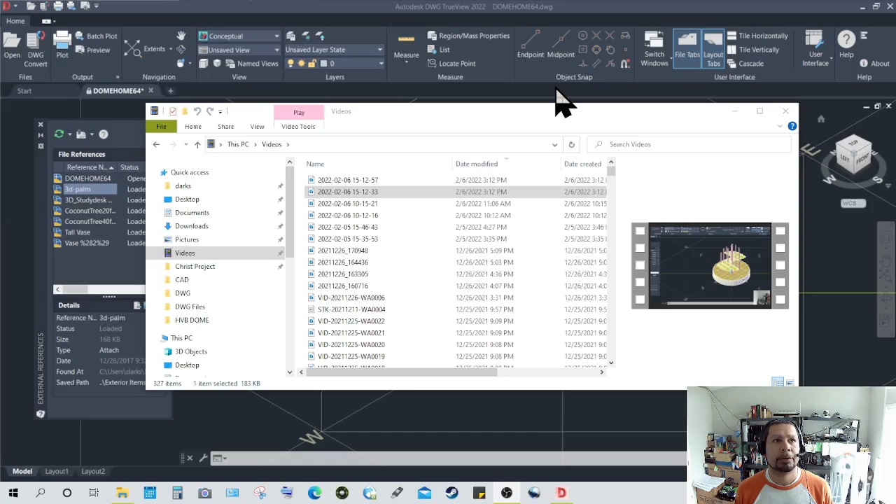This is the 64th iteration of that design. I decided to push forward even though I found some issues with the model, some minor layering issues that I will push forward with because I don't have the full version of AutoCAD right now. This is just a DWG viewer with very limited AutoCAD functions, so for the sake of time I will go ahead and push forward.

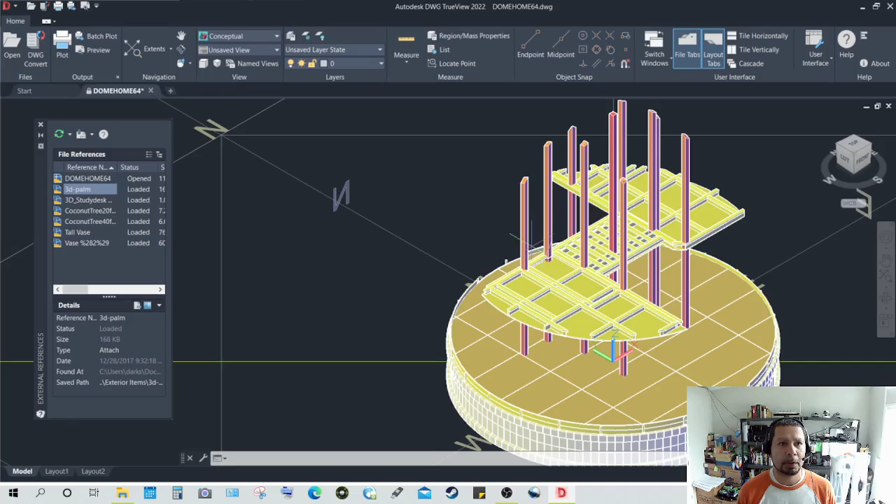This is the model again, showing both the first deck floor panels and the second deck floor frame. As you can see, these are 2x6 pieces or members of lumber, and the ones overlaid on top are 2x4s. Again, 2x4 not being the exact dimensions - as I mentioned, the real dimensions are 3.5 by 1.5 inches.

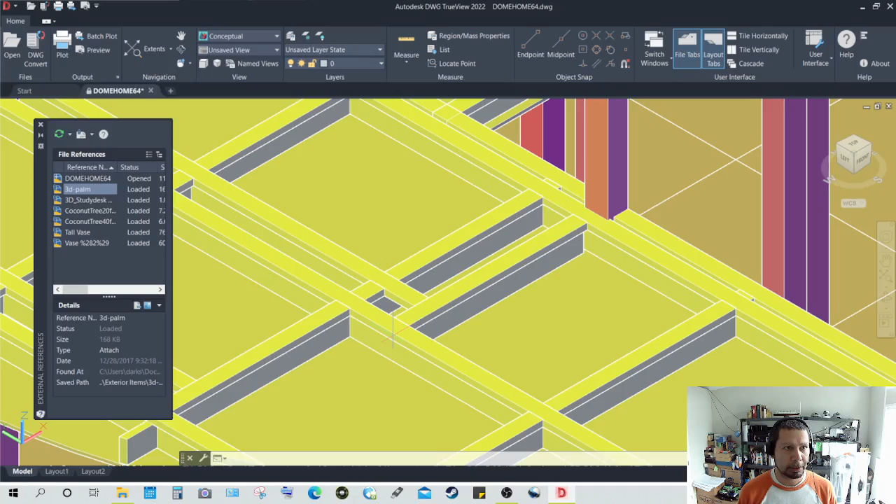So this is the floor or ceiling frame, whatever you want to call it. These panels underneath are the ceiling for the first deck, the ceiling panels. Again, these are 8 foot by 4 foot, or vice versa, planks of plywood or any other material you deem replaceable, similar, or better to use in this application.

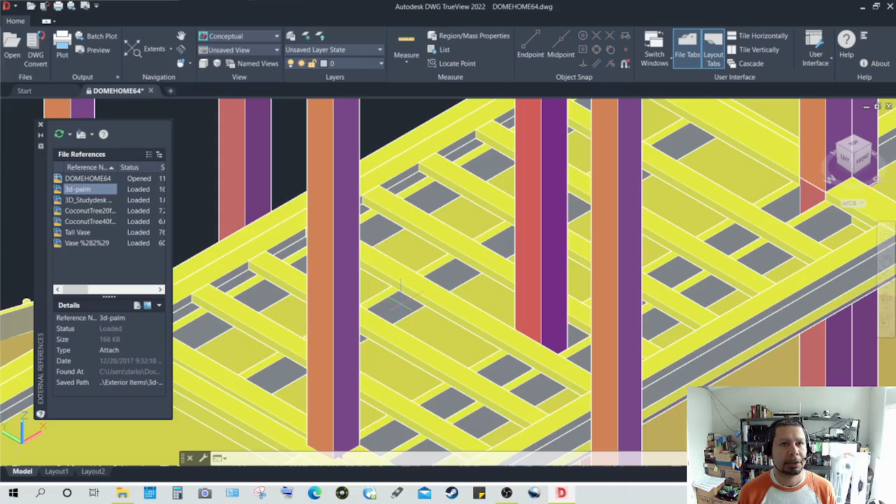Over here in this center area, right in the middle by the center column, we see a platform made up of many 2x4 members backed by 2x6s. Again, 2x6s being 1.5 by 5.5. That is the design, and we have about 1, 2, 3, 4, 5, 6 of the 2x6s running along in that direction.

Why so many? Because that is a bridge that requires quite a bit of support, vertical and especially horizontal. These 2x6s are attached to that column or pillar right there, securely bolted to the center pillar, as well as to this pillar, and to this pillar. Not to mention this pillar as well, and that pillar right there, which you cannot see so well from that angle, so let me change the angle.

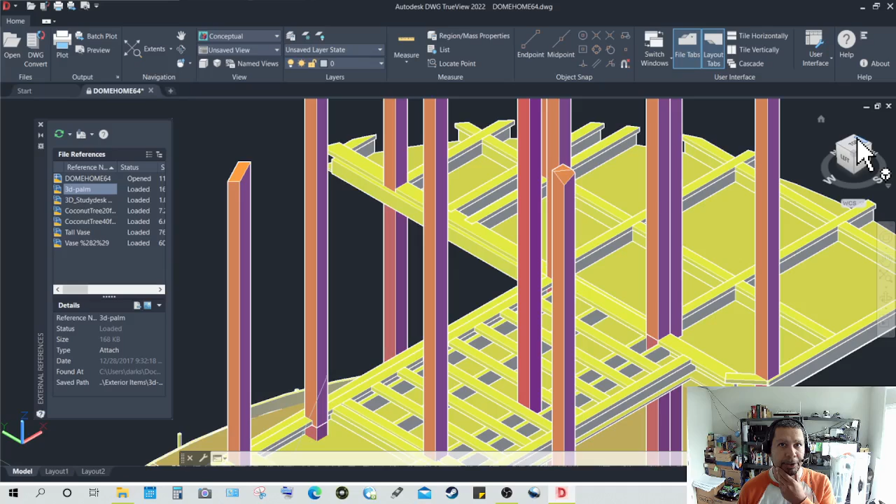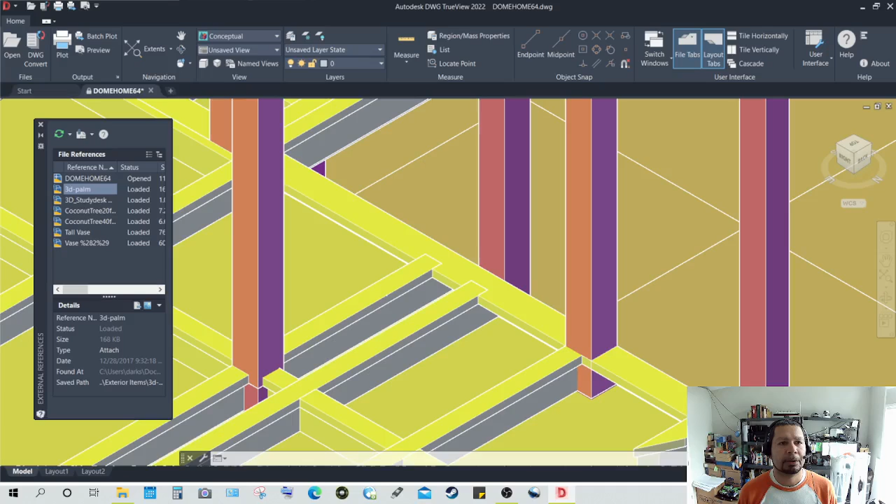And the pillar I was mentioning is that one right there, about near the center of the screen. Again, all of these pillars are attached to the floor or ceiling frame, securely bolted, if not bolted, braced with appropriately sized alloy deck screws. Same here in this area.

As you can see, these 4 members come in contact or are in junction with that pillar. The pillar, of course, is not penetrated. The members themselves are cut flush with the pillar and securely attached, perhaps bonded with some sort of long-term cement.

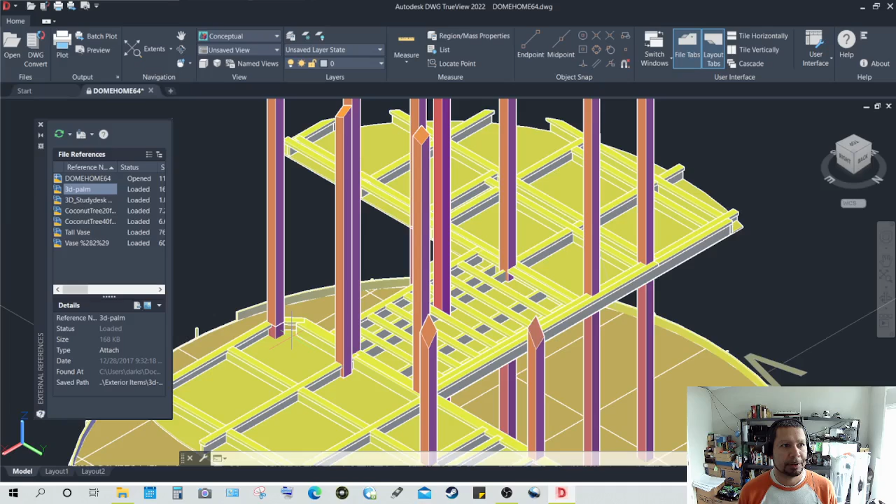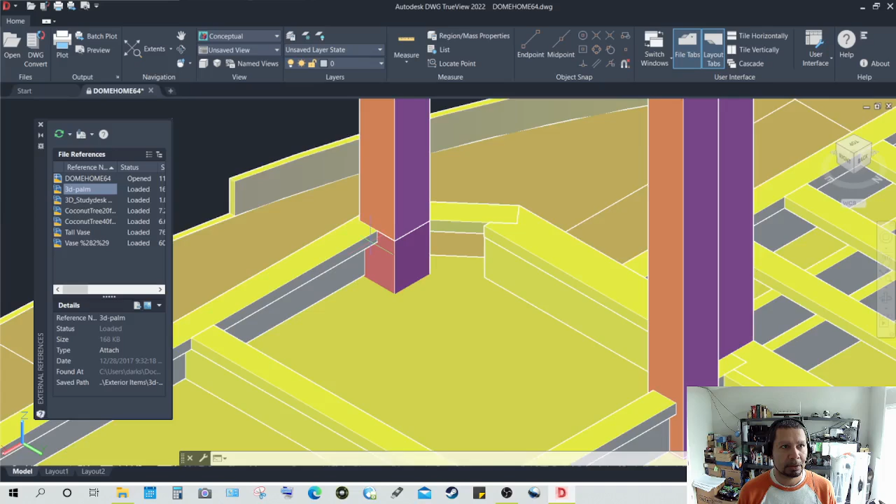Again, these members are securely attached and braced to provide support for this entire frame. All of these pillars provide support for the frame - they basically stand alone. If done right, if secured right, they really don't need any other support to stand for a normal weight, an average weight individual standing on this corner, other than the one I just mentioned, securely fastened to each point.

Of course, you would have to keep these members whole that entire run. Right here is a whole piece securely fastened to each of the pillars. This run is preferably also an entire piece from this point to that point, and I may consider changing that to run an entire run from end to end.

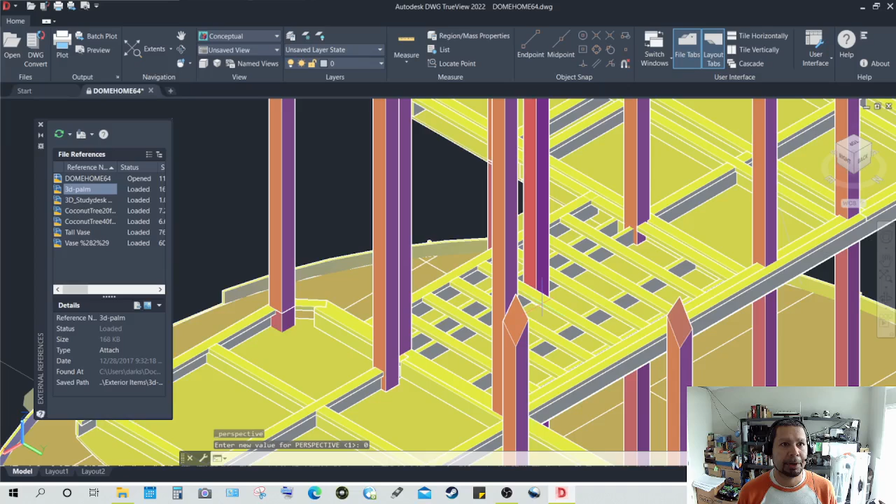That is another thing I will be changing, so that length of lumber is not interrupted, therefore providing much more support. Perhaps a steel truss can be put in its place and provide attachments to as many pillars as possible, perhaps 3 in that case.

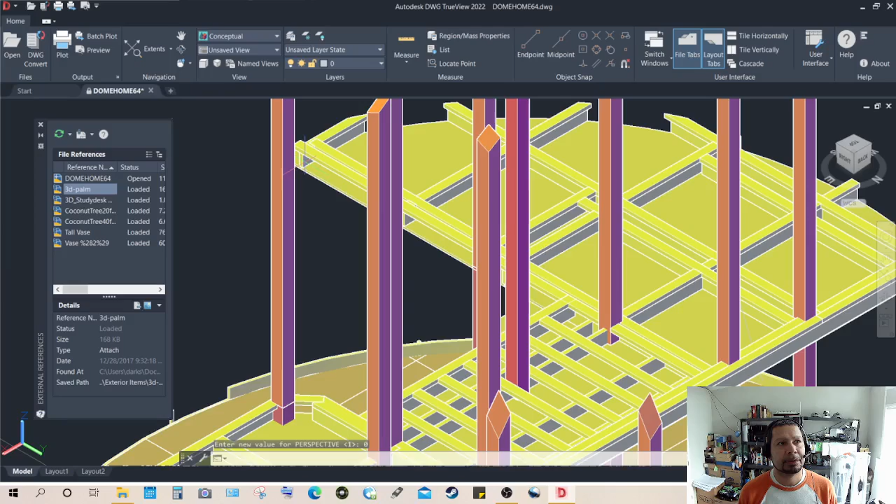The same would apply to this member right here, horizontal member - a very long run, perhaps close to 30 feet or even more. And the same would apply to a vertical member, a horizontal member that I think I may need to add right here, again being attached to as many pillars as possible.

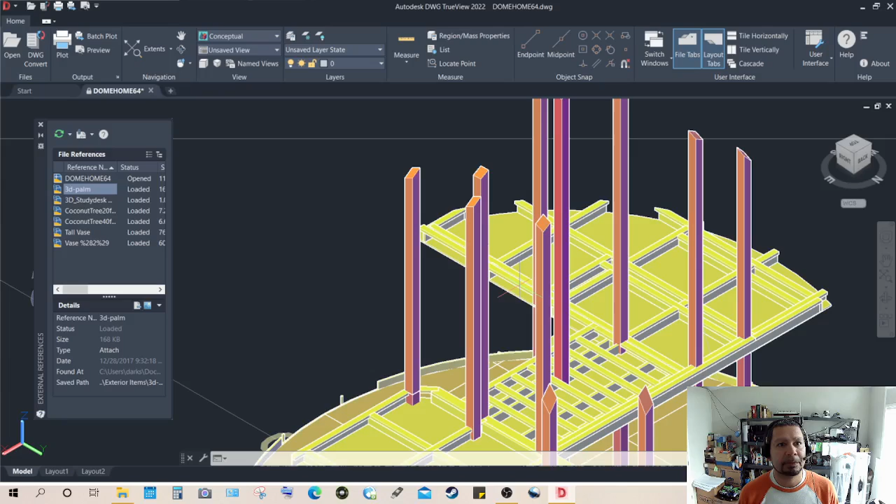I think there is a member that already does that - I believe that one, but I need to ensure of that. I cannot really see it from this angle, let me change it. And again, excuse the low quality and slow reaction of this software. I'm working with very limited hardware and software.

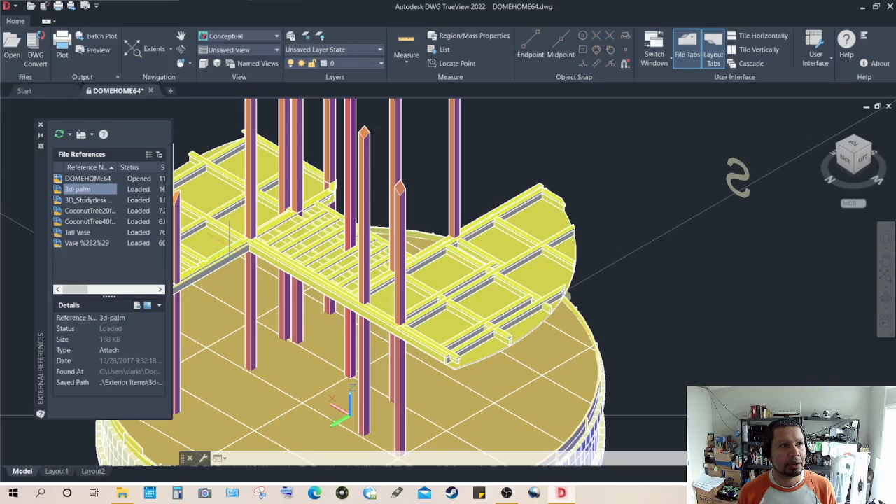So this indeed has a member that runs the entire length right here, attached to 1 and 2 columns or pillars, as I call them. This run right here, of course, is also one that is attached to these 2 pillars and braced to that one. And I will probably be thinking of making this an entire run, a continuous run.

So let me take a note of that. I'll be right back.

So basically these are right here, 2x4s here in the middle, in the bridge area. This is basically the floor or platform of the bridge. The bottom ones are 2x6s, and these top ones running from your left to your right, more or less, are 2x4s.

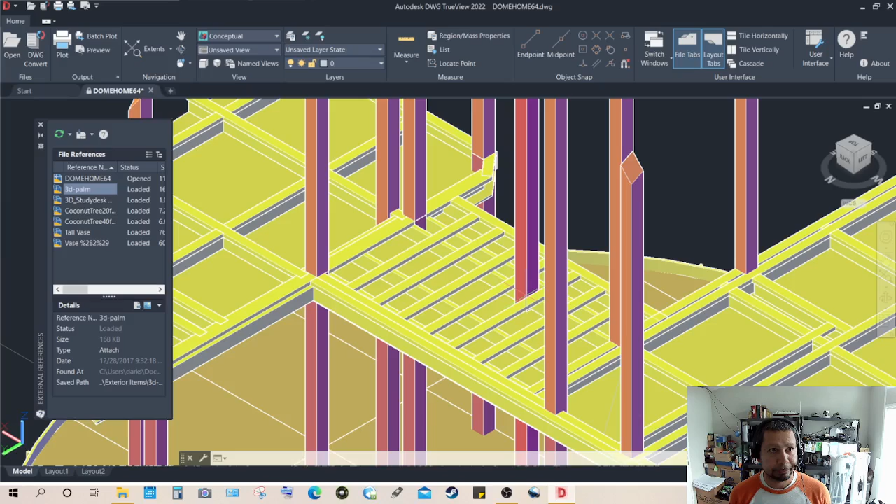Again, the 2x6 in this center pillar being attached to that center pillar, and that is the ceiling panels plus the floor frame for the second floor. So we'll turn on the panels for the second floor.

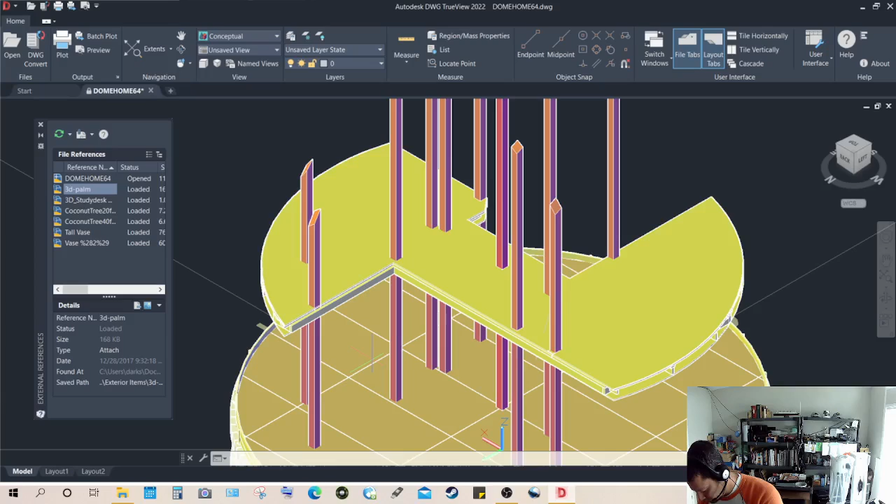These don't show the paneling divisions as they should, as they show on the bottom side. So I will take note of that, and show those divisions. I like doing that because that gives it a lot more information.

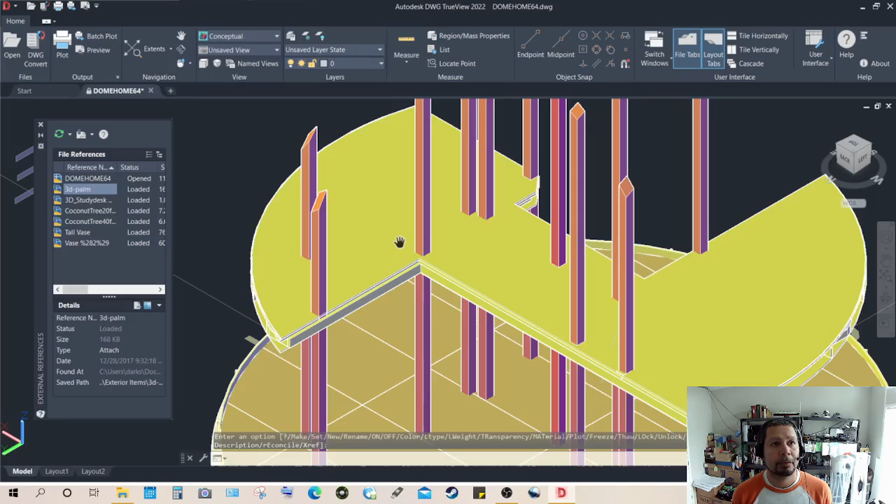Again, being a BIM design, building information model, you want to give it as much information as you can, and that would give information about how many panels it would be required to build this structure.

As you can see on the bottom, each panel is seen, so you can count and estimate how many panels will be used. Estimate cost, estimate labor, estimate all kinds of stuff.

So we'll throw one together with this. We'll throw on a few more layers to show what the interior frame will look like once built. So the interior frame for the second floor and for the first floor, which I call decks.

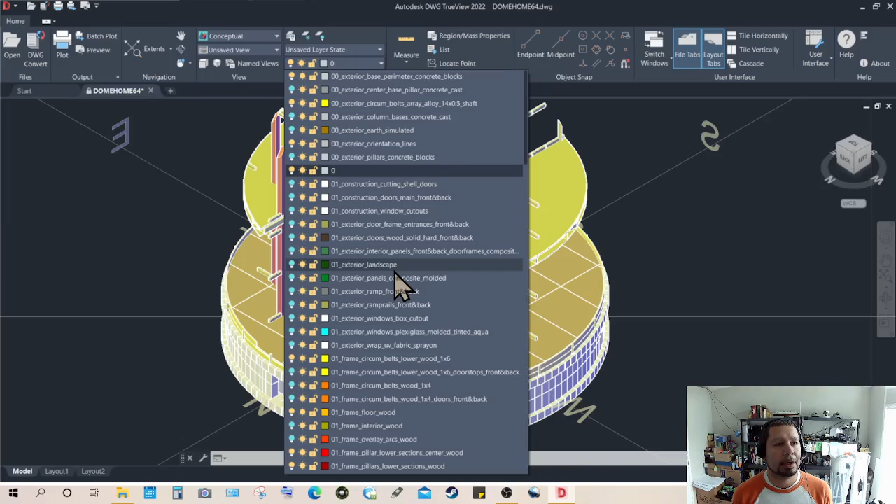I call them decks because this building structure is more in line with that of a ship, such as a submarine or a naval vessel, more than just a structure that sits there and is on life support, as some other people may say. This structure is being designed to be self-sustained not only structurally but also in utilities like water, sewer, and energy, as far as electrical and heat and cool air.

It's all going to be self-sustained. It's not going to require any kind of exterior connection.

So this is right here the framework of the interior. Again, it is being designed, being a working project, to be entirely self-sustained or stand alone. By that I mean it should not require the exterior skeleton to support it.

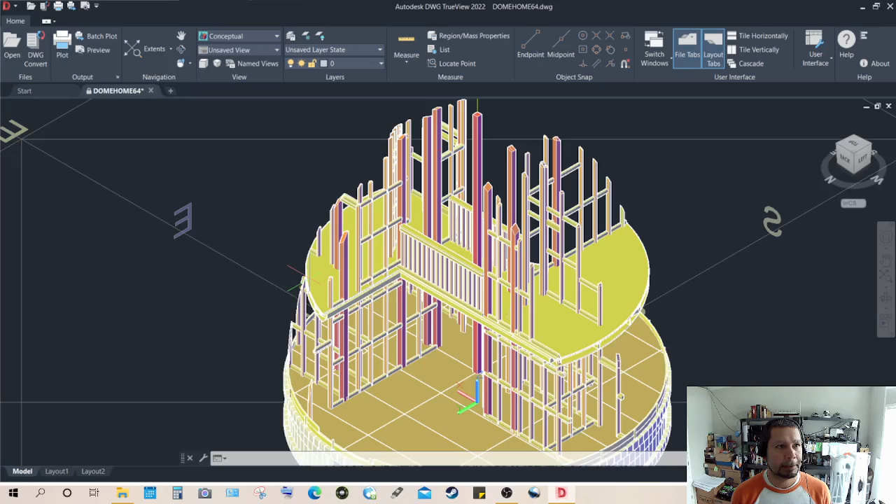As you can see, there are many columns shown in orange or dark orange or red for the main columns or pillars. And of course these green or yellow members going across are just support for the columns. They really do not bear too much weight, but they do add stability and rigidity to the entire structure, not to mention the utility of them as members that add to the structural integrity of the entire design or model.

Of course, more can be added. As everything, there's a limit, upper limits, dealing with cost and time taken to build, and necessity. I believe these are the basic members needed. Of course, you can add more.

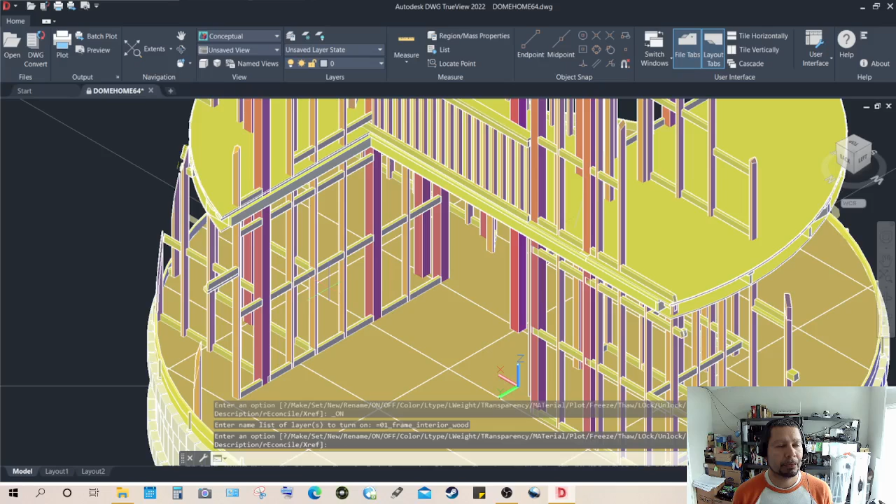I would highly not recommend taking off and using less for the sake of saving perhaps time and money, because I believe you will be deducting from the entire building's stability.

And just to show how the building could really stand on its own as it is shown right here, let me show you a few other views. This is a more perspective view, more as your eye would capture it in real time, real life.

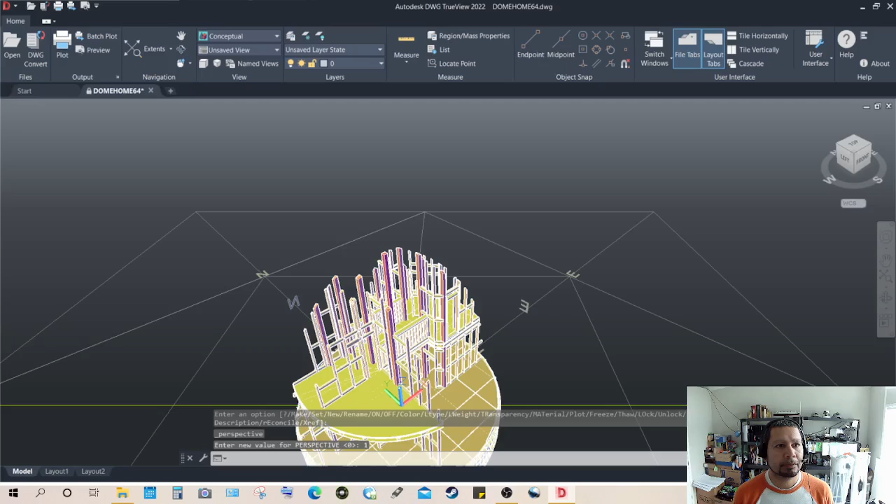So as you can see, the entire first floor, or this floor area up top, you can stand at any point and be supported by vertical columns, some major, some minor, meaning some small, some larger. Like if you were to be standing right here in this corner.

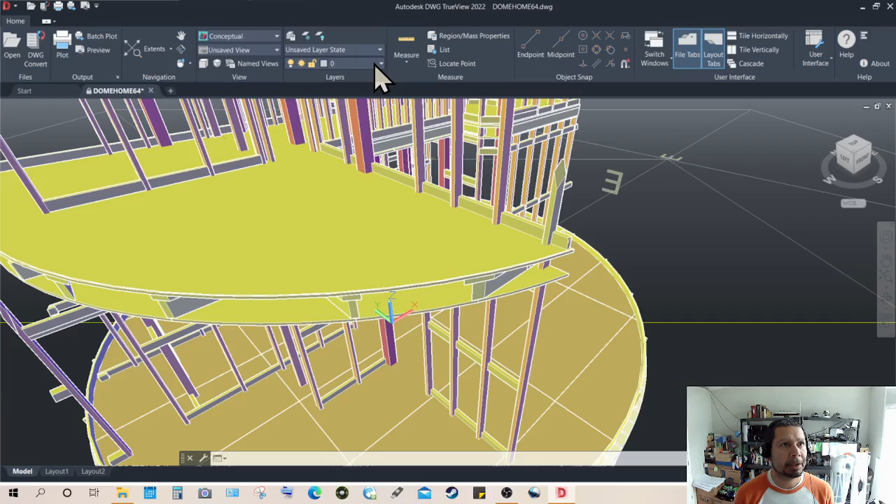Let me turn on the human reference that I have to give you an insight or perspective of what an average size human would look like inside of this structure.

I do have a rendering, or a series of drawings that showed just that, and I call it human reference.

And here they are. I use these mostly for showing a reference and also to accurately put views or cameras, as I will show. I have many different views as seen from the perspective of a person, and that person is shown here.

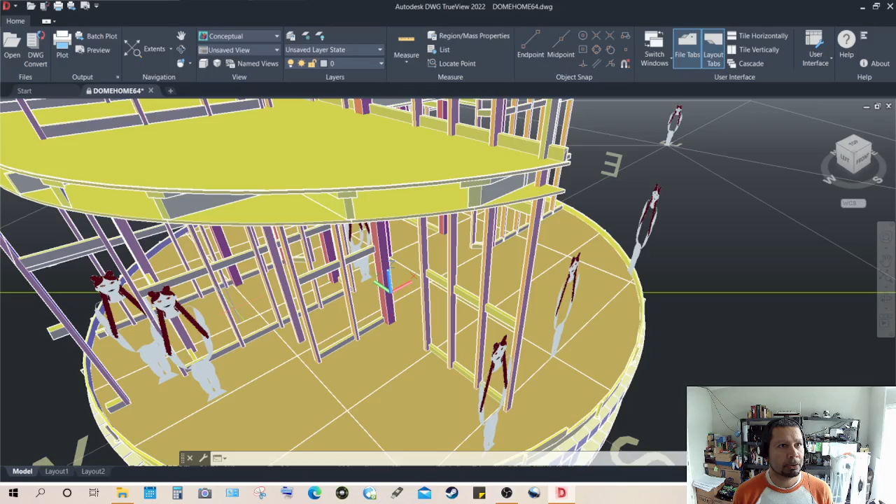Unfortunately, I only have a few up top, none of them here in this open area. But back to my point, you can stand anywhere on this floor area and be well supported by vertical columns. I will show you a view from the side that shows that a bit better.

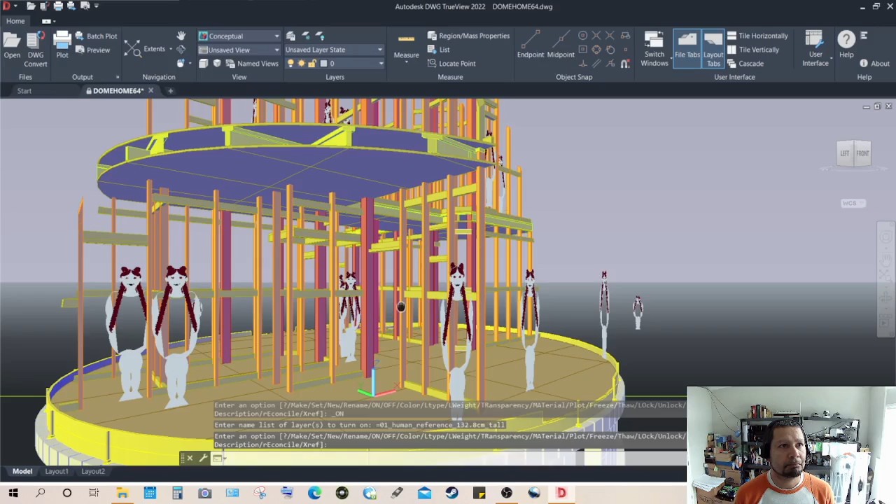And there it is. This area right here is probably the one with the least amount of vertical support. This area that I'm showing right here.

The software is blinking just a bit. We should stabilize this area right here, probably the one with the least amount of vertical support again. But this, however, is not a problem.

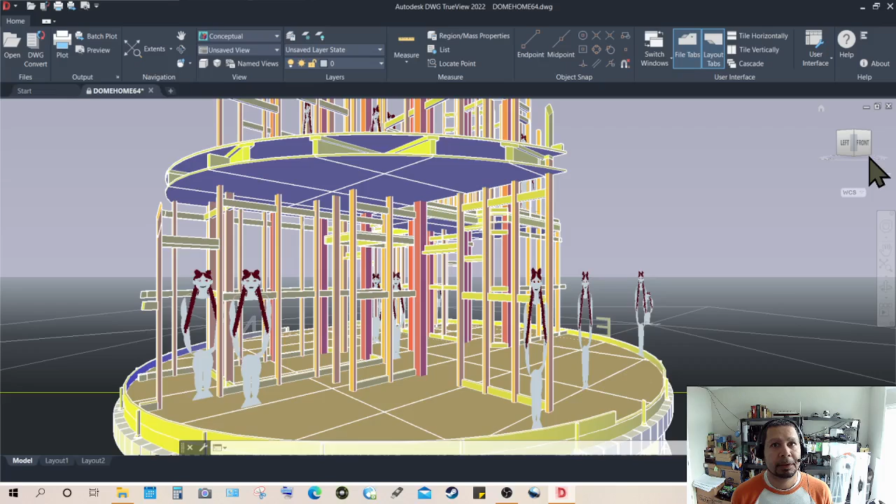This floor area is being designed to attach to the exterior skeleton, these trusses here, and I will show that here next. But first, to give you a view of the other supports from another side.

This area, the center area mainly, is well supported on this end, on this side, by vertical columns and pillars, again all securely attached to the floor frame on the second deck, as well as the first deck.

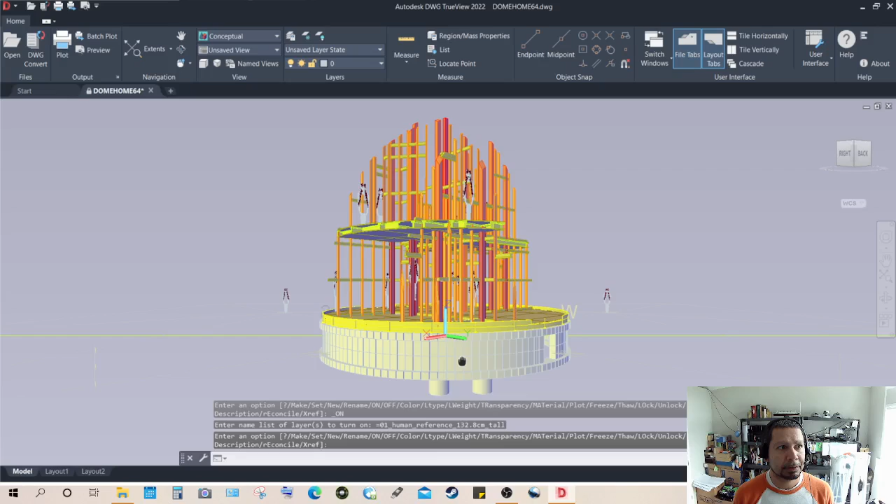Another corner view, this is the northeast. That's why I put those large letter indicators there, so they can be easily identified. I put them on both plans, the vertical elevations, or side view, and also the plan view, so it can be easily seen from each of those views.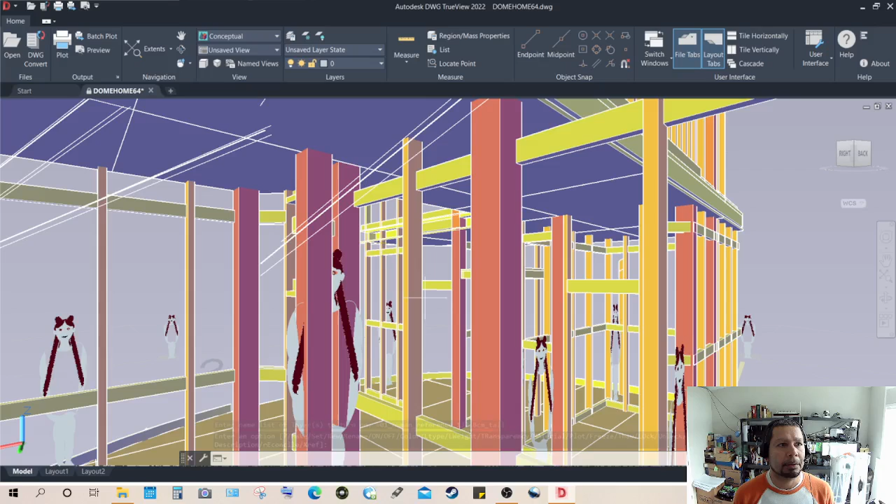And as you can see, plenty of vertical column support for the floor on the second deck. Of course, the floor on this first deck is supported by the concretes, both the concrete arrays, circular or perimeter array, and the ones on the inside, the square feet or bases.

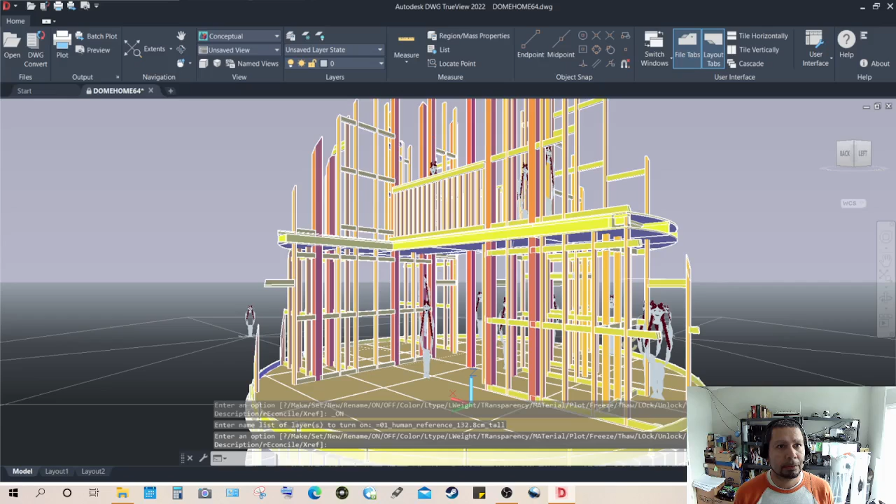As you can see, I went over that in, I believe, the last couple of videos. So that shows you there that there is plenty of vertical supports. Of course, I may decide to add some more here when I finally get the software running, the powerful and all important AutoCAD.

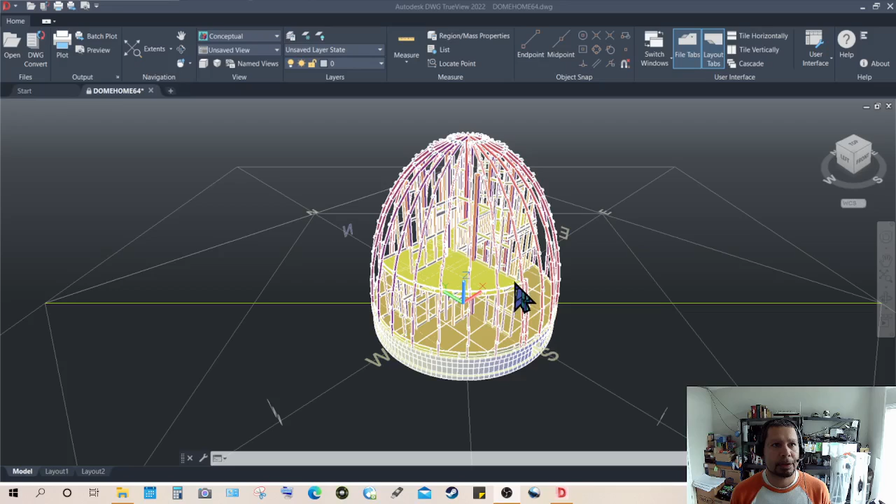Okay, welcome back. This right here, I have turned on the layer for what I call the strut braces and the struts, which make the framework, or the skeleton as I call it, for the dome. So here you can see the dome itself starting to take shape from the outside. This is considered already part of the exterior.

These red pieces, represented in red, I call struts. They are nothing but 2x4 members of a certain size. I'll have their exact dimensions in the plans, in the drawing documents that you can freely look at.

Why did I use these instead of just using a whole piece curved and all that? Because again, this structure is designed to be built with the least amount of materials, with available materials, and with the least amount of labor and skill. Even one person is conceivably able to put this thing together. That's how I planned it.

So these are basically pieces or cut members of lumber. Could be lumber, but more preferably some sort of composite material that is stiffer and sturdier and denser than wood. But it could be a high quality type of wood.

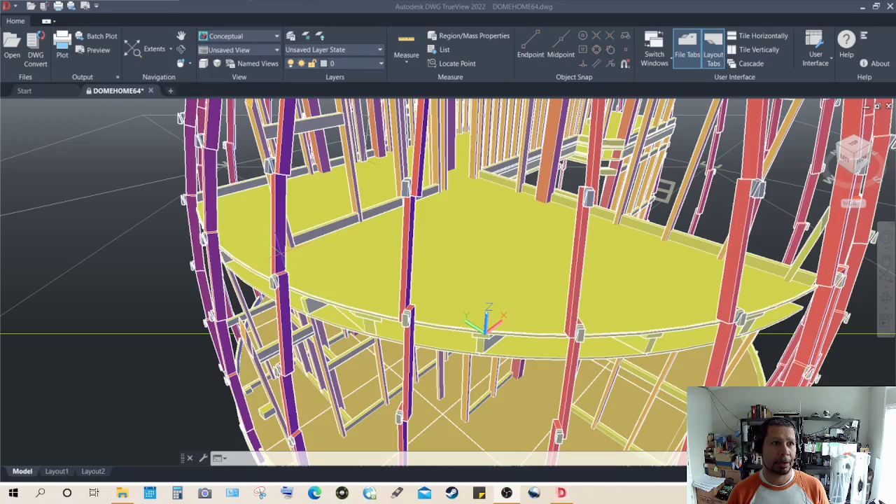These will provide the arcs that I'm looking for in the design. The basic concept of this design is the use of a series of arcs, ovoid elliptical arcs, and I will show you what I mean here in this view. As you can see, if you focus on the last or the very extreme sides where I'm pointing at, this arc, that is basically what it is, an arc, kind of like the St. Louis arch.

An elliptical arc is among the strongest, most stable, and structurally sound shapes and objects that you can find in nature. Think of an egg, think of many other shapes that resemble an egg, and this is what this is: an oval, ovoid, or elliptical arc.

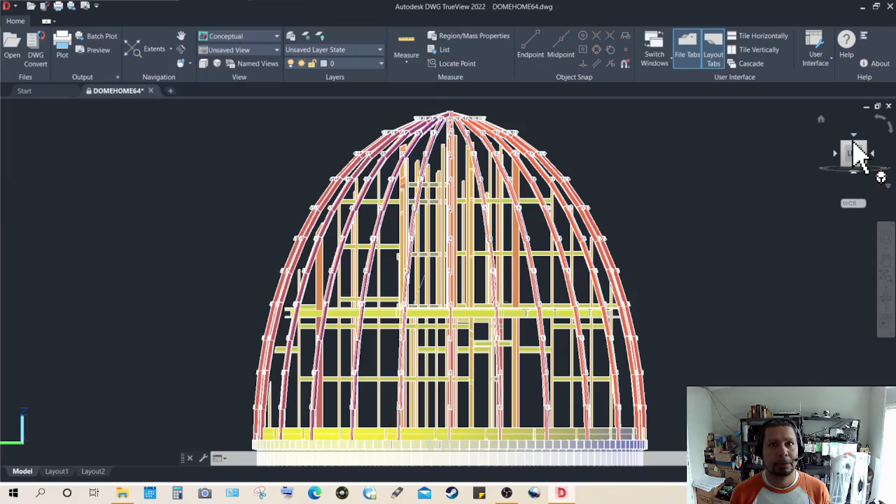And it's not only an arc, it is an array of arcs. It is a series of arcs revolved around a common center, as I will show here. From the top, a plan view, that is what it looks like. And I believe this to be among the most stable and structurally sound buildings you can basically put together.

Oh, but you say there are only, out of all these arrays of arcs, let me see: 1, 2, 3, 4, 5, 6, 7, 8, 9, 10, 11, 12 — 12 arcs.

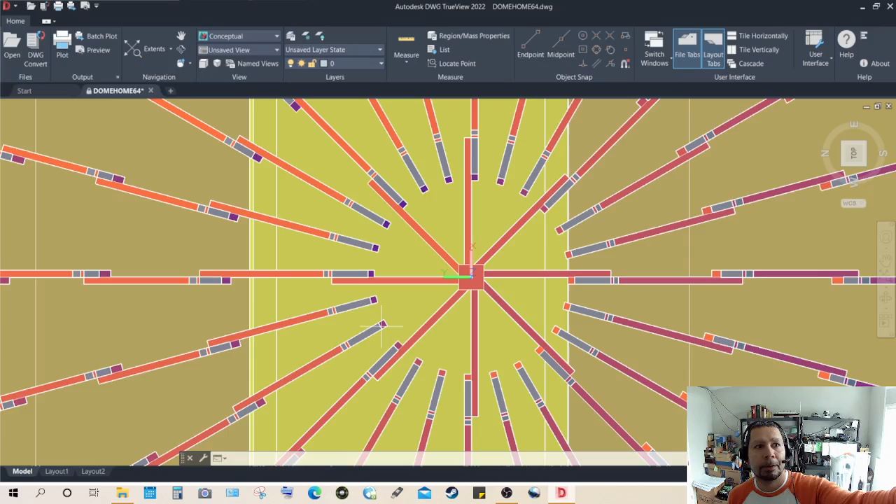Complete arcs, but there are only 4 arcs that you say are completely made, or they are basically going into each other's opposite. They complete or mirror each other. And if you look at this, yes, that's true.

But there will be another structure here that I will show, that basically distributes the support among all of the arcs that are not completed or not mirrored or not sharing another side, an opposite side, like this one is not sharing an opposite side as this one just yet.

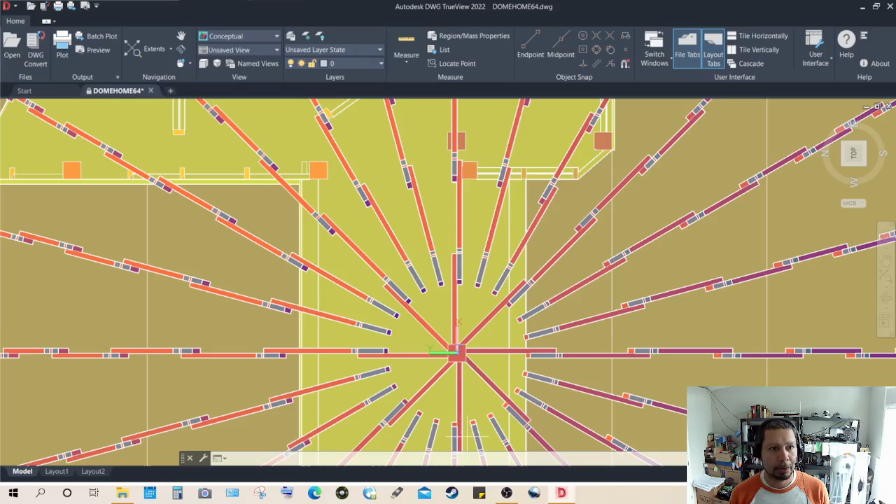But once I put that circular or circumference shape or structure and fasten them up securely with bolts, it will transfer whatever forces among the entire structure, and I'll show you that here, what I mean.

But even without that, even if you did remove the arcs that are not touching the opposite end of the arc, it would still be a sound structure.

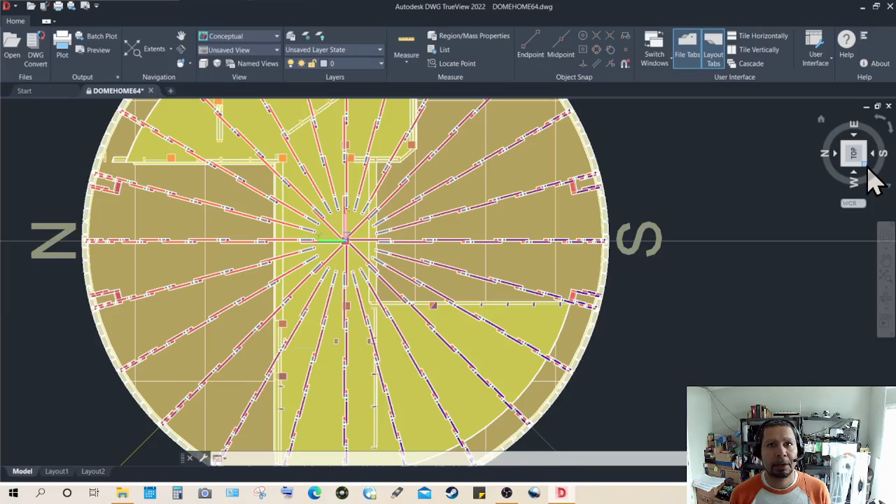I believe this is the center column or center pillar with these members attached, which are in turn attached to each strut, as I call them. Each strut is again secured to the strut above and the strut under it via bolts, and I have a certain arrangement of those bolts.

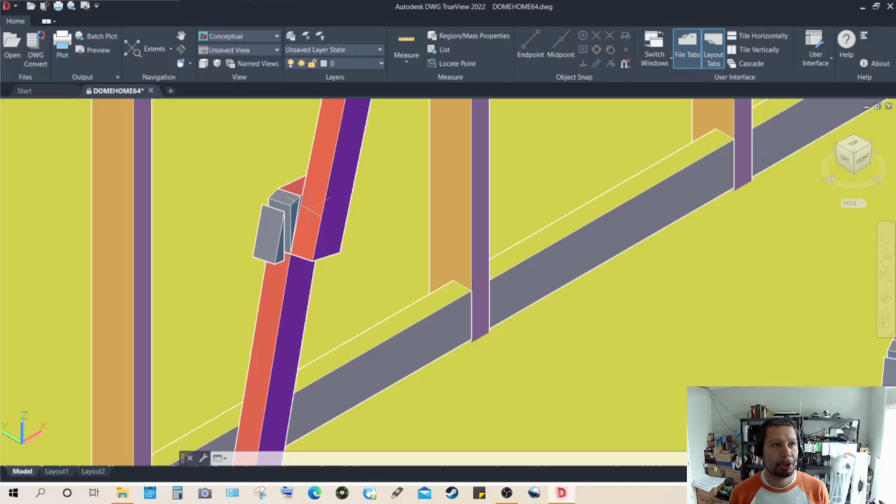Which are to be flushed on one end, at least flushed with the strut, going through both of the struts and securely and almost permanently bonding that strut to the other. Of course, you can use certain type of cement bonding material to make that bond even stronger.

And I will go over what these are here momentarily. So that's the array of struts. I believe they are about close to 3 to 4 feet.

If I have to, no, there are more like 2.5 foot, 2.5 feet, if I remember correctly. But do refer to the drawing documents for exact dimensions again.

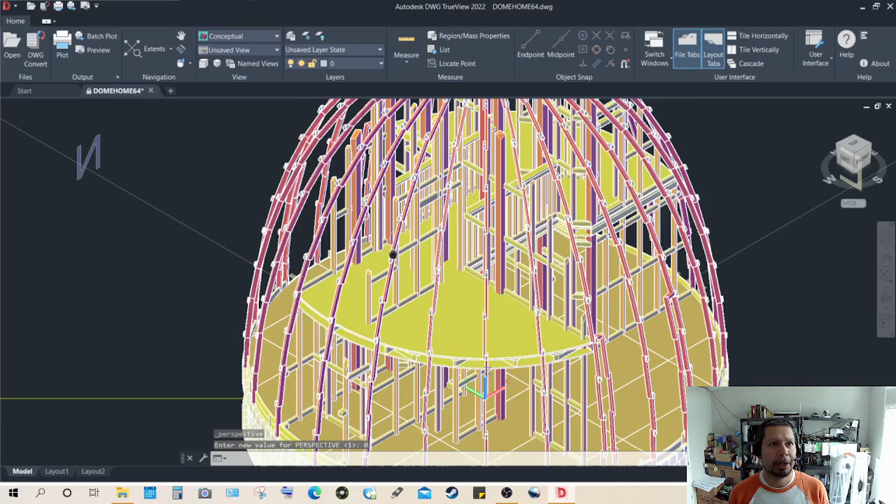And they are arrayed in the fashion shown, of course, equally spaced and attached all the way to the very top of the column right there. Securely fastened, very strong, very sturdy and durable, yet flexible and giving structure.

That is what you want, a giving and somewhat flexible, semi-flexible structure. You don't want something rigid that will crumble with a little bit of shaking of the ground. You want something that gives a little bit.

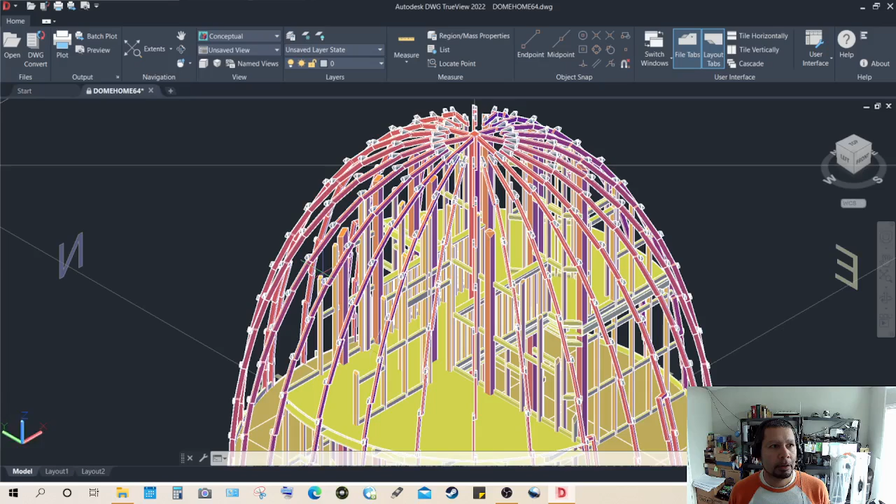So these gray appearing pieces here, or twins, are braces. These braces are triangular in shape. They are uniquely dimensioned for each rank or each row, whatever you want to call them, going from top to bottom or bottom to top. So these two, each one is a different dimension.

Each one on each row again. So these two are the same dimensions. These two are the same dimensions, but not these two. Now these are not the same dimensions as these, but they are the same dimensions as these, and so on.

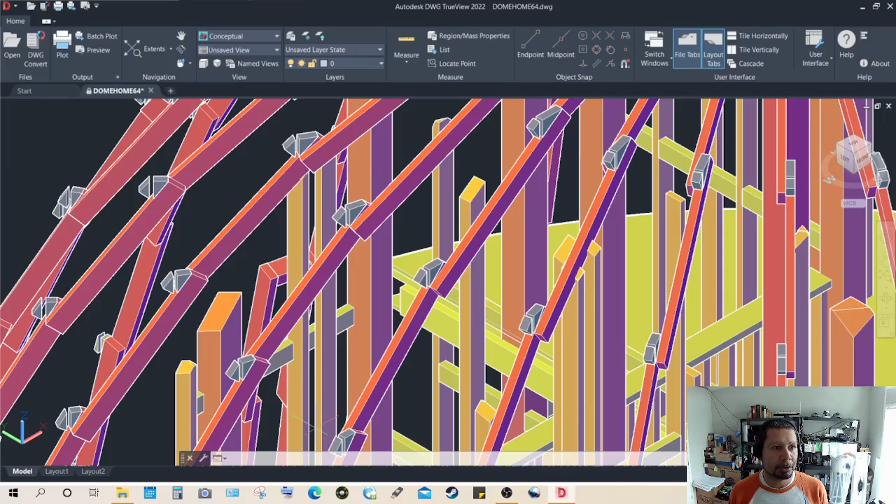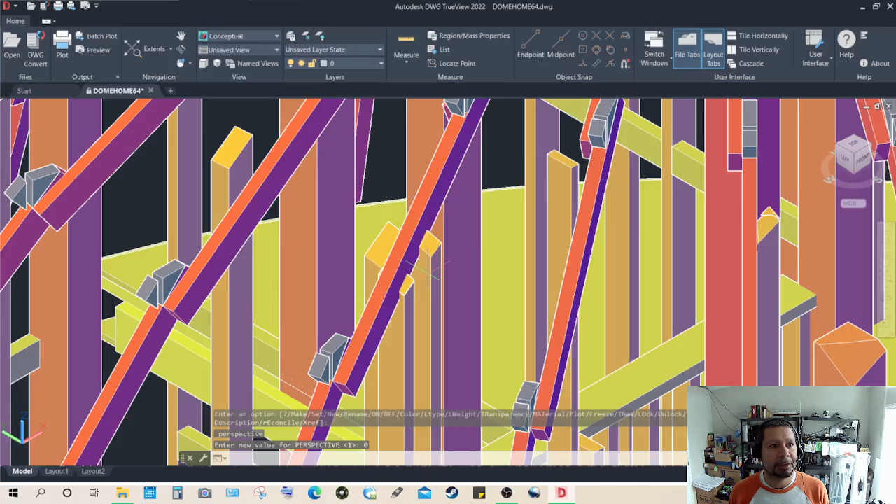As you can see right here, this is a perfect example of how the inside is braced with the skeleton and further supported. The skeleton itself is further supported by a few of the junctions.

There aren't many, but there are enough to provide more. Like this one here could be one. There are many to support and provide more stability to the entire structure, not only the outside but the inside structure as well.

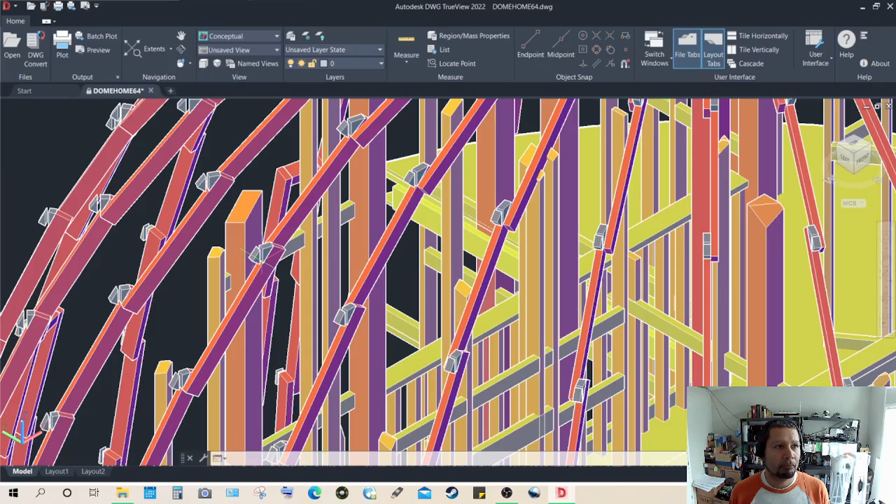And I will turn on a layer that will show you exactly what these braces are for, but before I do that, we'll analyze the bottom struts, which are very important.

They provide a way for the actual framework or the skeleton to be attached to these belts here that I mentioned earlier, that go around the perimeter and are stopped from expanding or spreading by these bolts that go around the perimeter as well.

But these struts are cut in a way that they will have a narrow slit that they will slide right into these wooden or composite or metal belts.

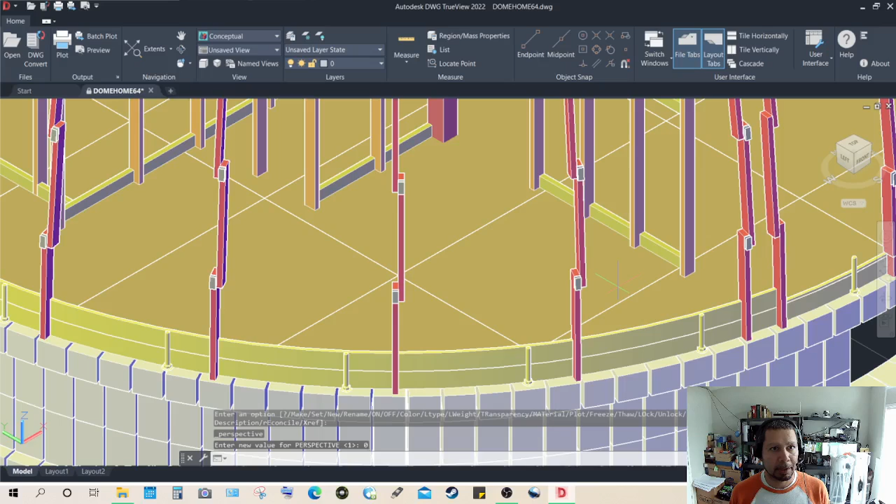Again, these struts could be made of wood, could be sourced from some type of aluminum or lightweight alloy or composite. I mean, whatever suits for the construction.

As you notice here in the entrances and exits, the belt does not go the full height. It is cut to the dimensions shown on the drawing or the construction plans as such, and this is to be flush with the boards, the floorboards.

This cut will make this flush with the floorboards and get it ready for the building of the entrance doorway, door frame, on each end, the south and the north, as shown in this drawing.

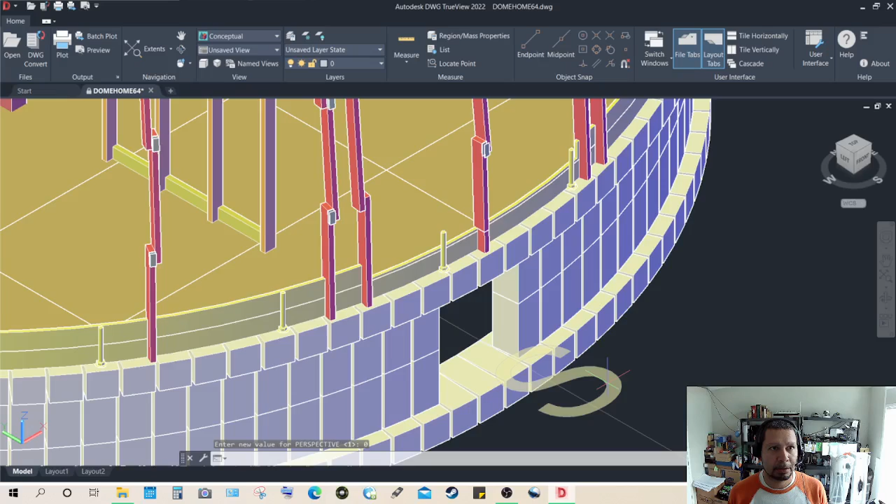Of course, this doesn't really have to match the construction site, these cardinal points, but I have them as reference here for purposes of analyzing the drawing, the model. So this is the entranceway, this right here.

And that's why they have double struts. I may have to, and will, copy those to each one of those as well. So we'll take note of that. Again, I am improving this design and model as I go.

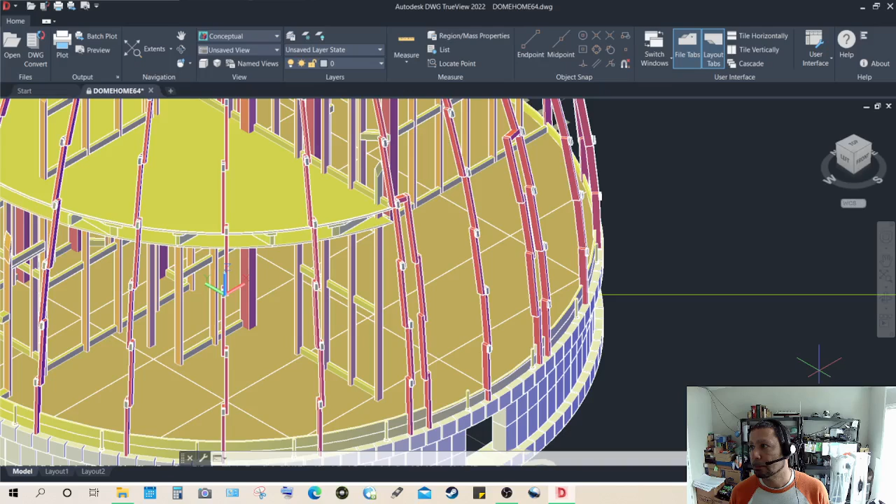Okay, so I'm back. So that is that. The bottom struts are very important, and the way that they are cut, very important.

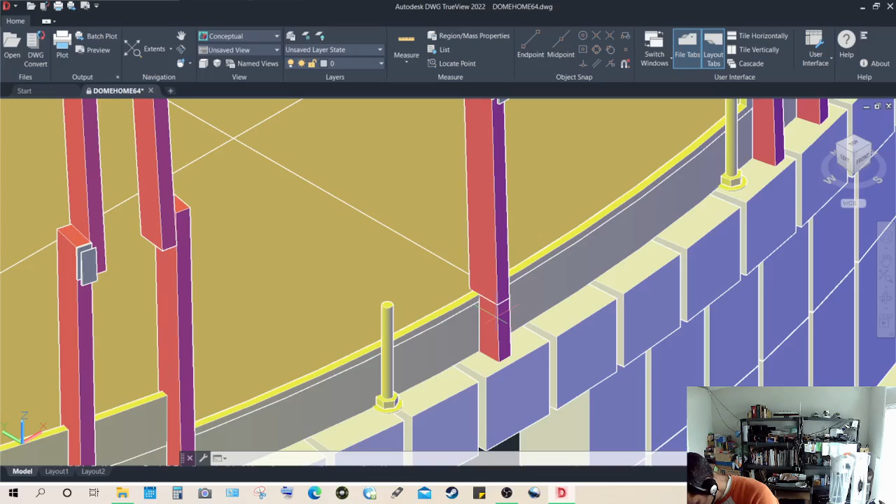Taking note as I go, I will have to get rid of that cut right there, as this should be a whole member. Again, making improvements as I go. This is a working model. I have been working on this for many hours, perhaps hundreds of hours now.

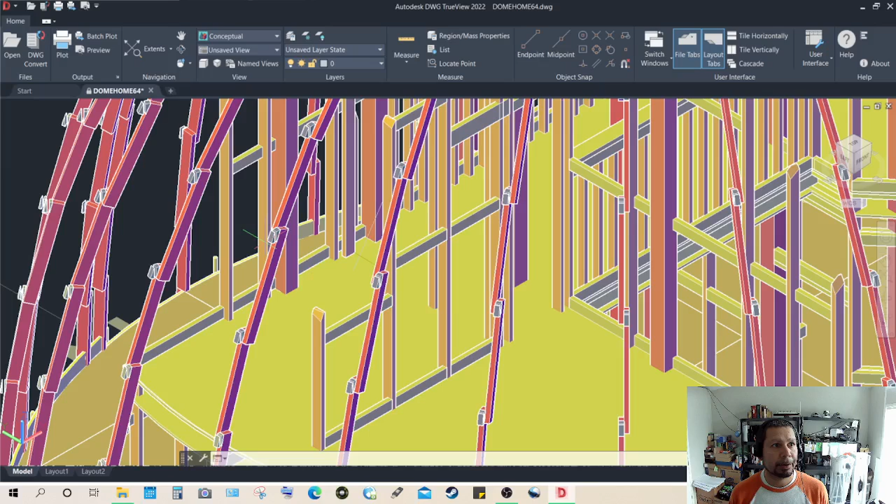Moving on to why these braces are there: side to side stability and integrity is not so good right now as those arcs go. You can stand in between those two arcs and push them apart, and they'll bend like a rubber band quite easily. Not to take away from their integrity, if you were to push them back and forth into and out of the center, they would be a lot more rigid.

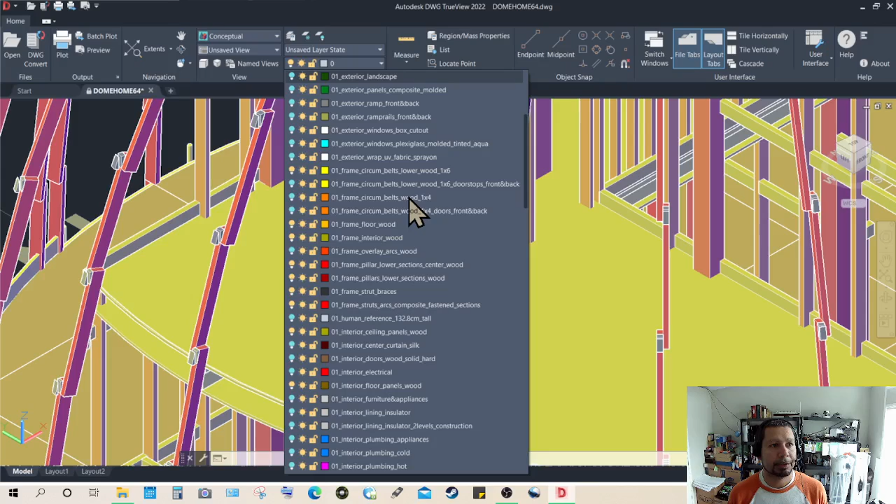But to fix the instability or the lack of rigidity from side to side, I went ahead and developed that system. That system is original, it's an original design, and very easy to build, I believe.

Very easily sourced for the material. The material should be, I believe, a composite. I would not recommend wood, but it could also be made of very high quality and dense wood. I would recommend materials such as composites or even a type of metal, lightweight alloy, if these struts are sourced with alloys.

So, just to show you my answer to the stability issue.

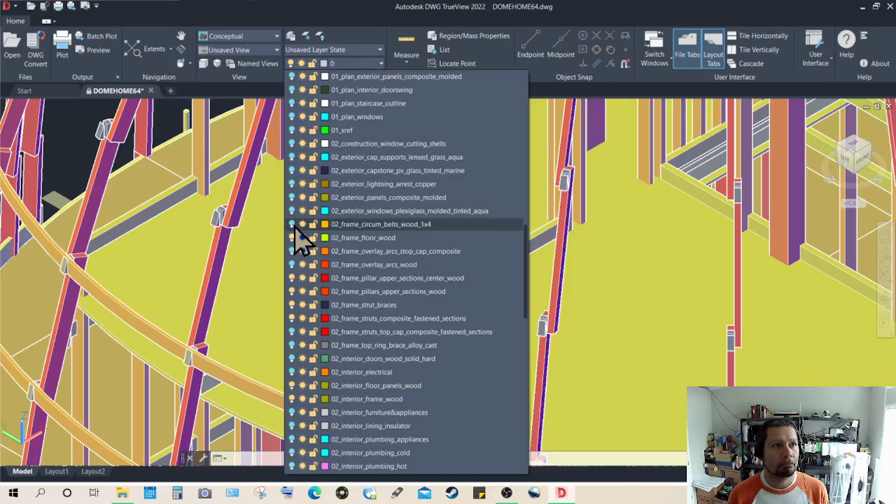There are horizontal belts all throughout. These belts are to be securely fastened, perhaps using adequately sized screws that go all the way through the braces, not necessarily the strut. You don't want to go through the strut because you'll have an ugly, dangerous, and damaging sharp point sticking out from the other side.

So you want to bore. I will have a recommended pattern to bore through each of these struts, and basically use adequately sized screws, deck screws preferably, or something similar or better, to penetrate and secure them. Of course, it could also be sealed and glued or bonded with a high strength, high flexibility, high durability, long-term adhesive or cement.

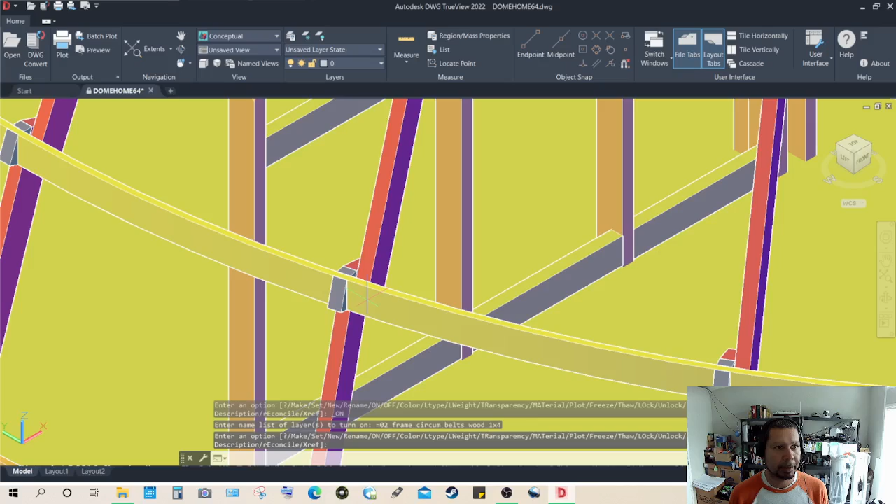And you would do that in each and every location. This would require a certain amount of skill for accuracy and to perform this in a timely fashion, but it is quite possible.

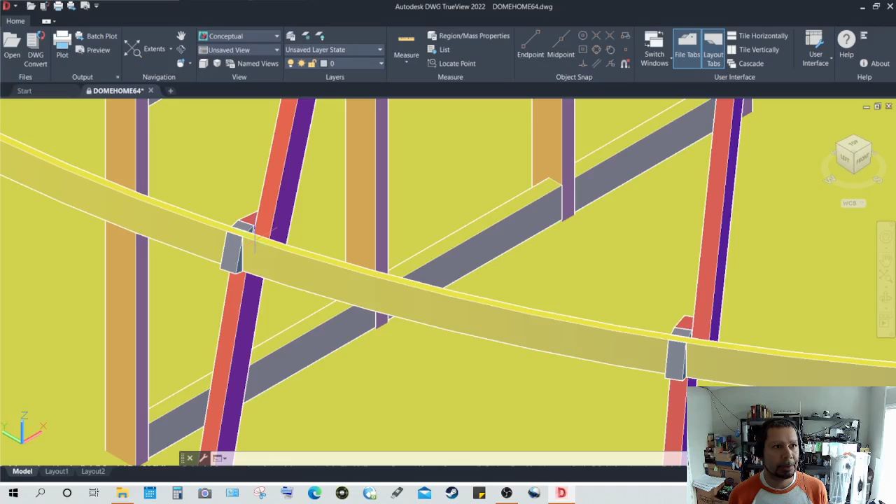These belts are designed to be made from wood, but not necessarily so. They could be made of other materials such as composites and even alloys that will take the shape. The most important thing is for the material to be able to be bent to shape without much energy use or labor-intensive or equipment-intensive methods.

And just to change the view so you can have a better idea of how the belts would be placed, this is how they would look as viewed from the side.

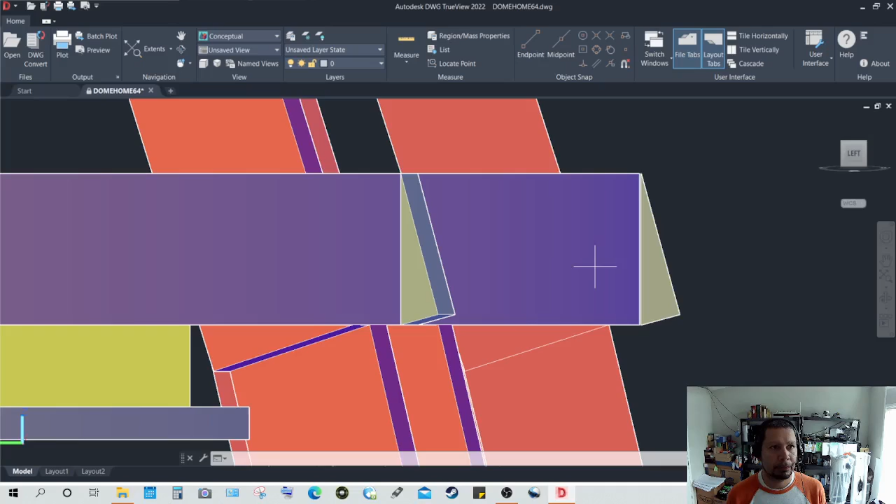Why, you say, they would have—I know the triangle on the inside supports the belt itself, so what is the triangle on the outside, you would ask? The answer is that the triangle on the outside is part of the structural support and integrity of the whole arcs.

The arcs are not done yet. The arcs have two parts: the struts and another piece that goes on top, and those pieces are the overlays, the frame—what I call the frame overlays.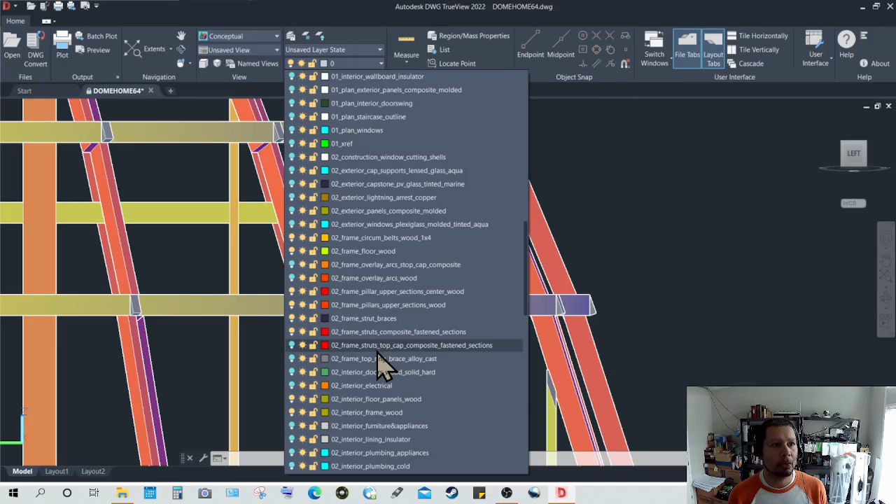And they're nothing but pieces of either wood or composite that provide the surface to attach paneling. You want a surface to attach the outer paneling to, and this provides that surface. Not to mention that it also provides strength for the arcs.

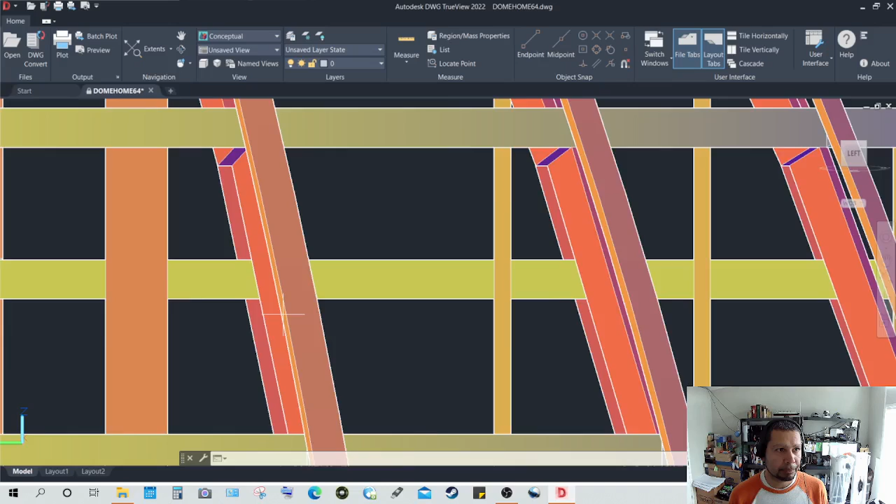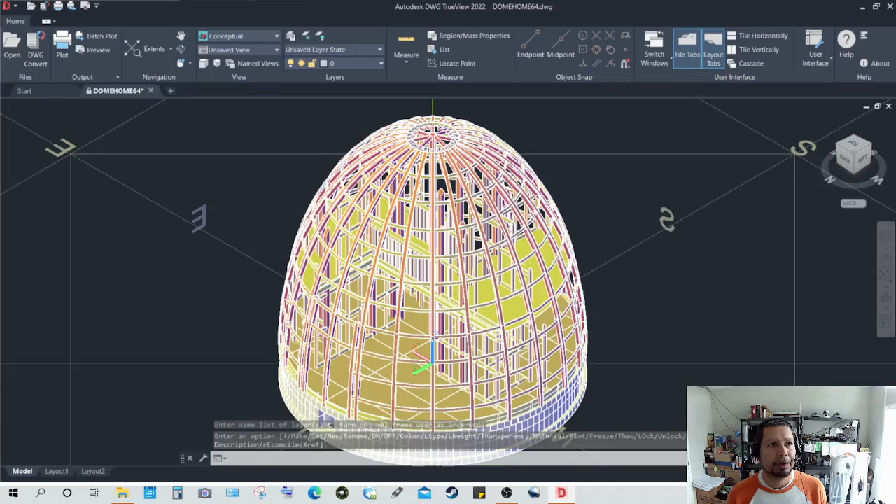If you can see here in the dark brown, these are those surfaces I speak of. They are nothing but 4 inches wide by 1 inch deep, and of course they would be equally sized in length as such. If you can't tell really much by this view, I'll fix that for you—this view tells you exactly what those overlays are like.

These are the overlays in orange here. As you can see, they are very much attached to these triangles, via a recommended pattern of screws, alloy screws of adequate size. Of course, that would have to be pre-drilled, pre-bored.

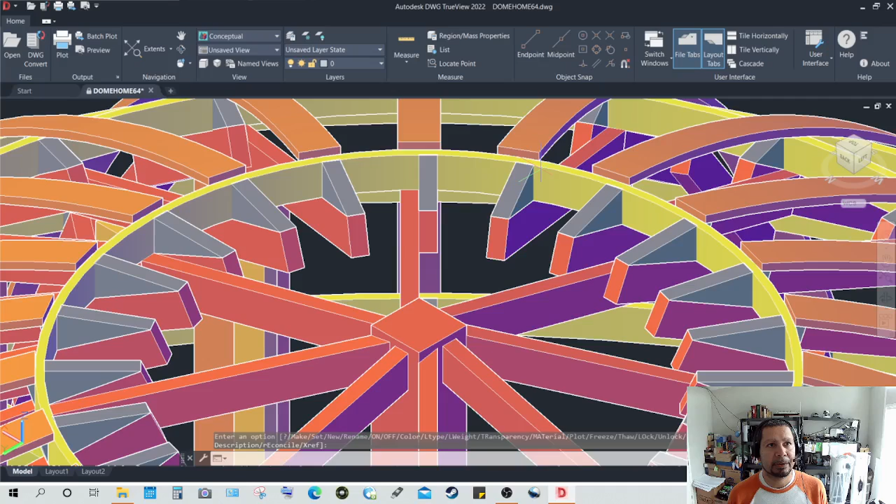It would make, I believe, a neat and good looking, strong, durable and sturdy structure. This top ring is very important for the stability. It distributes the strength or the loads throughout

the top of the structure. See these arcs that as of right now have no end or attachment to the center, because they would just overwhelm the center with too many materials, too many members. So for example, these two on this quadrant, the weights or forces they bear would be distributed right here with this ring, along with the others, the other rings or belts. They will be distributed among the others.

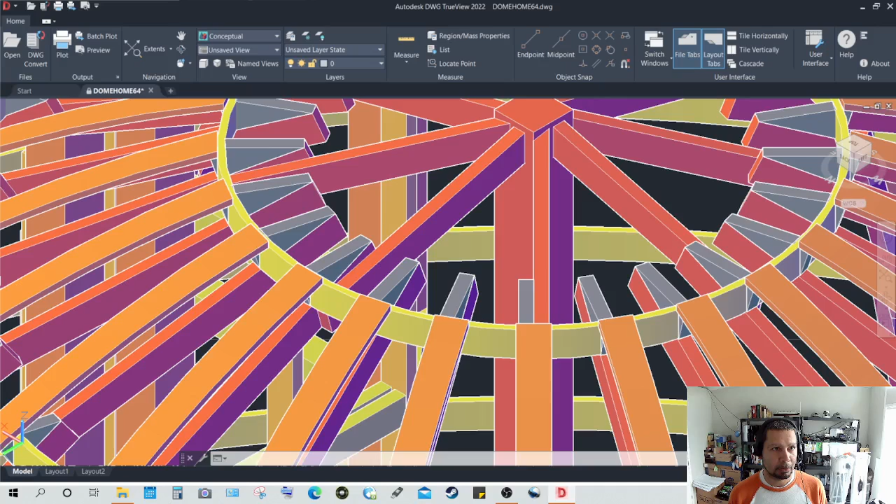They would share the load. That is a basic concept. When you attach the members, when you fasten them together in some shape, way, or fashion, they will share the load that each member bears. Of course, the place of attachment is critical, but this right here, I believe, is pretty close to optimal.

However, it is not entirely optimal as of yet, and I'll show what remains here, what needs to be here to make this a very sound structure, and I will show that now.

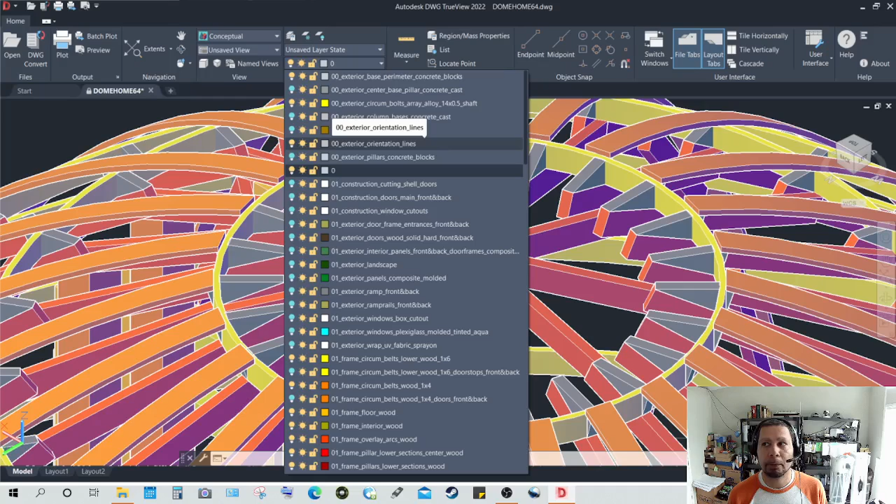So this right here is the ring structure that I mentioned just before I went on break. This is an alloy structure or ring of very dense and substantial size and thickness. I believe it is 6 inches tall or deep and about 2 inches or 1.5 inches wide, more like the standard size of a 2x6, which is 5.5 by 2 by 1.5, but made of alloy, some sort of high strength alloy. I'm yet to decide on its exact composition, but it should be alloy, it should be metal, I believe.

It could alternatively be composite. Perhaps it may be a viable option to use composite, but it must be a very strong and dense material so that you can attach and secure each and every one of these members. These members go right through this material, and that material should be able to be bored here for that member and go straight through

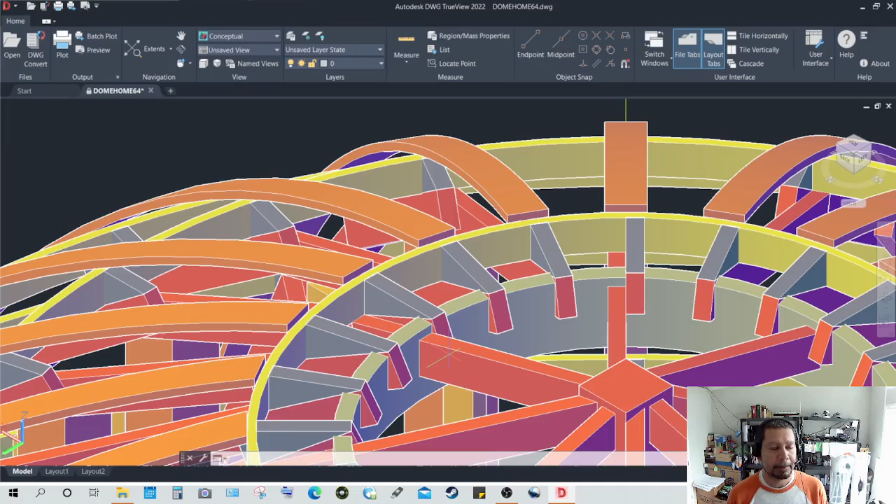and be bolted in place, not screwed, not nailed, but bolted, so you can securely take that member, which should be a composite, for strength and durability, so it could hold on to that member like it's its own, like it is basically part of it. It must be fastened good enough to make this part of that member, whether through a combination of cement and fastening, or by fastening alone and straight friction.

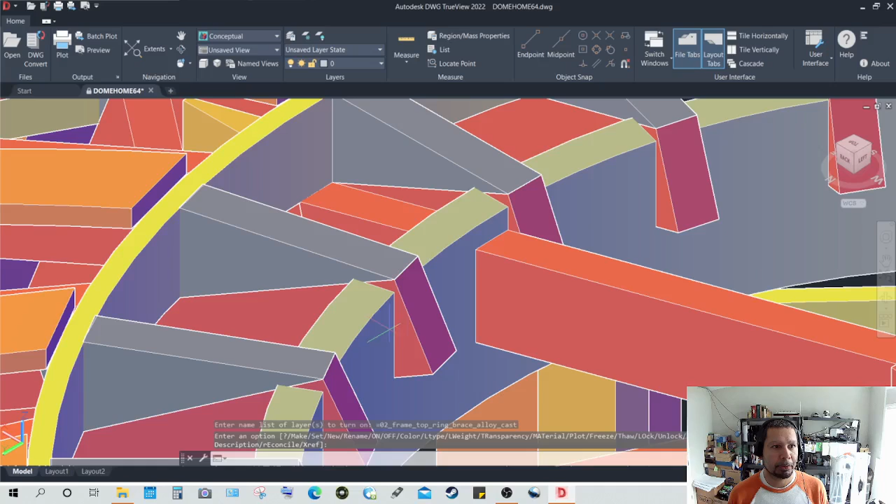This member right here must be fastened again to this ring in a fashion that, as you can tell, is quite easy to see and do. This is something I need to basically design and draw out, so I can visibly show a bracket that goes from top to bottom, that attaches on each side to the ring and to this structure here, to this brace,

straight down through this whole member and bolt it. So there should be a bolt going right through with a bracket, perhaps alloy metal, that goes bolted to that, and then with a hole so a bolt could go right through that. I really need to show that, visibly show it in the plans and here in this model, so there is no question what must be done here, because this is very important to be attached.

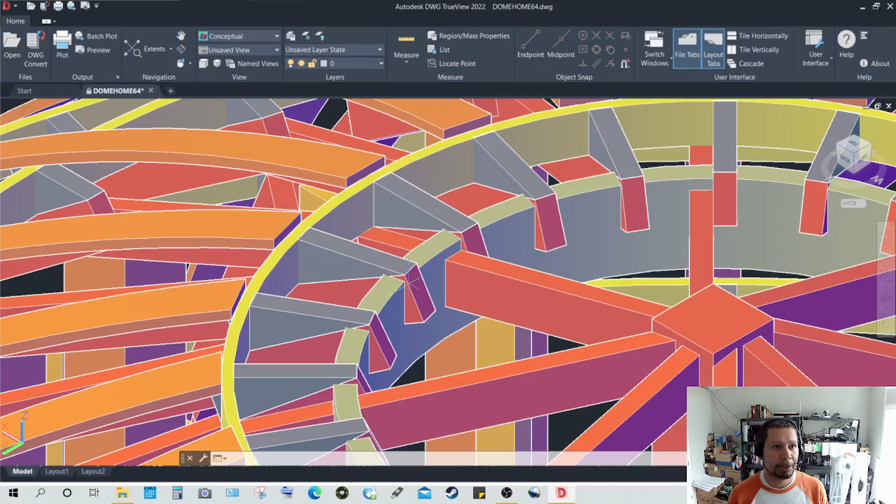It's very tightly and securely attached and fastened to this member, to this ring, so that it can share the structural load throughout. The same should be done to each and every one of these, these being much simpler attachments, bolt right through, of course being bored, pre-drilled with an adequate size hole, machine drilled, not spot drilled with a hand tool. It must be done with a machine or a bench press drill. Very machine-like.

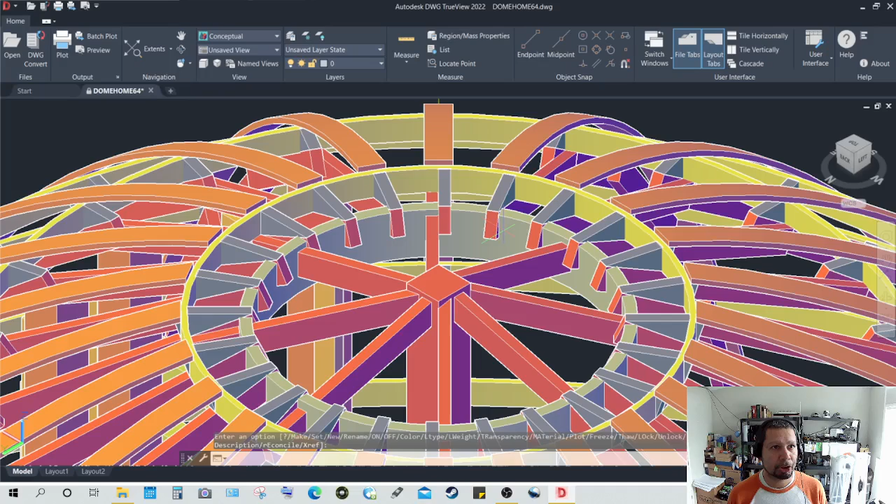Again, this is the top ring structure. Very important, very critical part of the whole structure. And I believe it to be a very sound and strong structure. This series of arcs, ovoid or elliptical arcs, supported by a center.

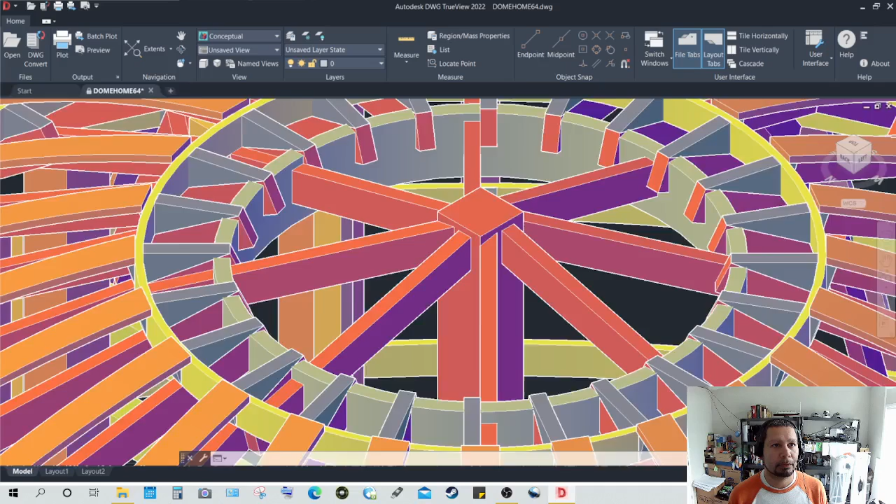This again is to be steel or some other type of alloy. This center column goes all the way down into the ground a few feet deep, with a concrete pillar cast or footing. Very sturdy, very secure, and very stable construction and design there for many years and decades of use, perhaps longer.